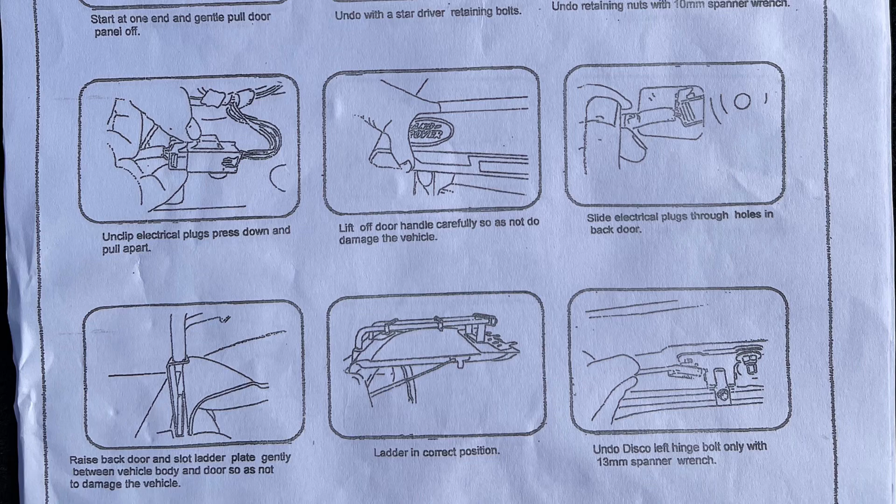The dreaded instructions. Is it bad that step 1, I have no idea what they're talking about? Look at that, step 1. What is that picture? It's going to be a bad day. So apparently that is that, step 1.

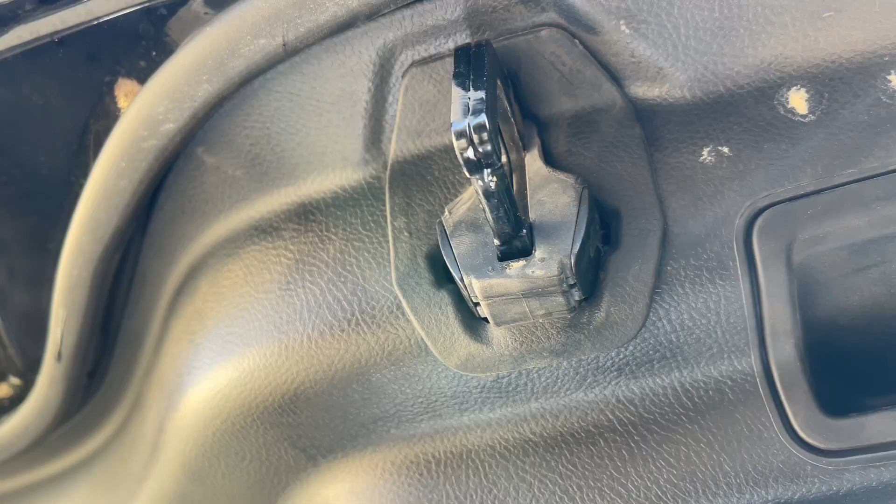So now you've got to gently remove this rubber locking grommet. I hope these instructions get better, but that's step 2.

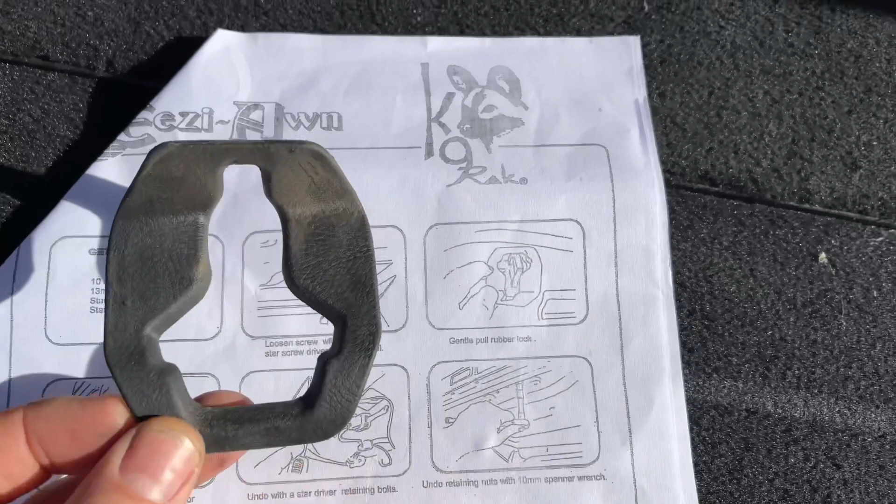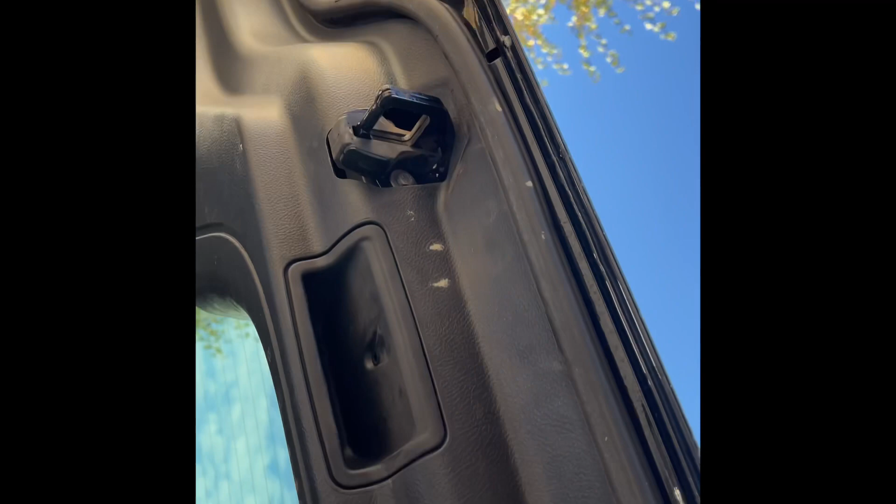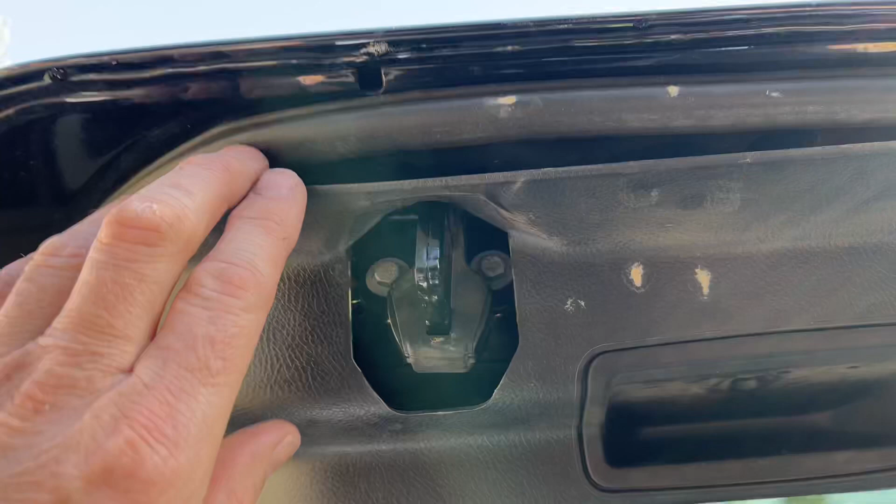Step 3, we'll just start at one end and gently pull the door panel off. So I'm guessing this here, it's got to come off without breaking it. This part here, I've just put my fingers in behind where the lock mechanism is and it seems to have pulled out. I'll just show you - in here, it's started to come away. So hopefully, oh, it sounded positive.

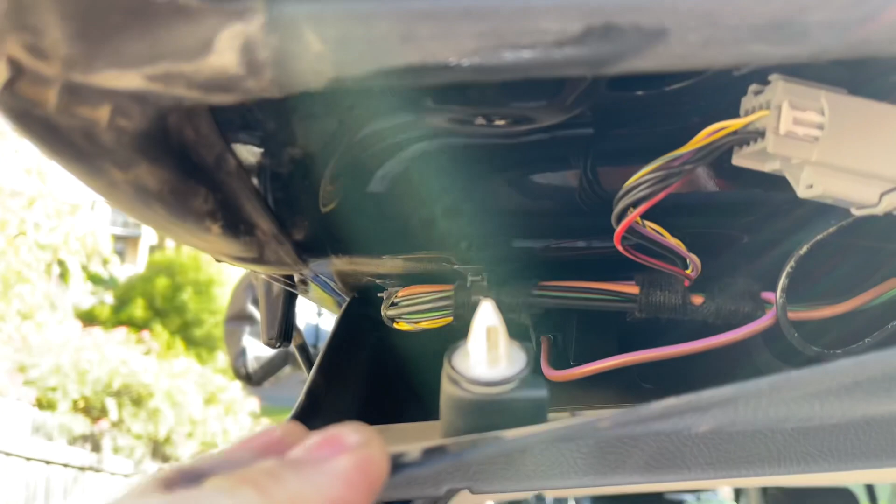Let's just see if we can gently - give me a second, I think I need 2 hands. So I'm just working my way along this edge. Just put your fingers in as far as you can and just keep prying it out. And there's little white studs, I suppose, that clip in. So hopefully I just work my way around - we might get this whole thing off in one piece.

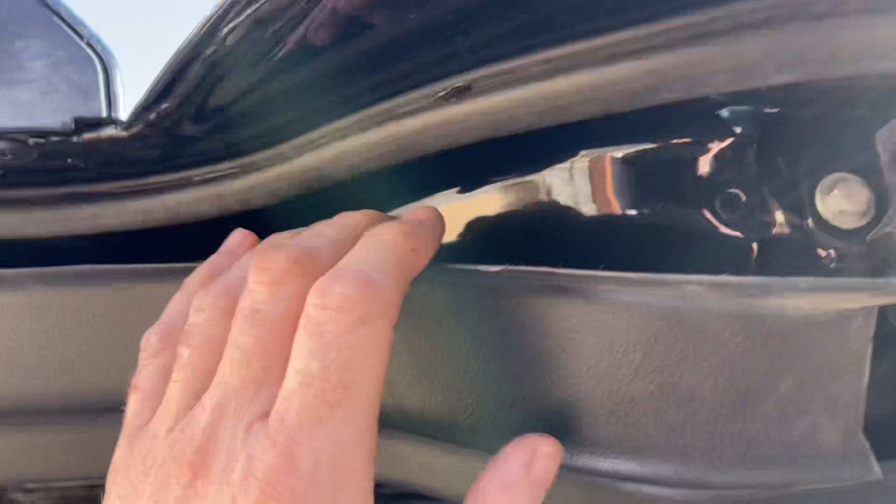Oops, I'll grab that. I think that's done the job. All right, looks like this is the last little bit, hopefully. We're nearly there.

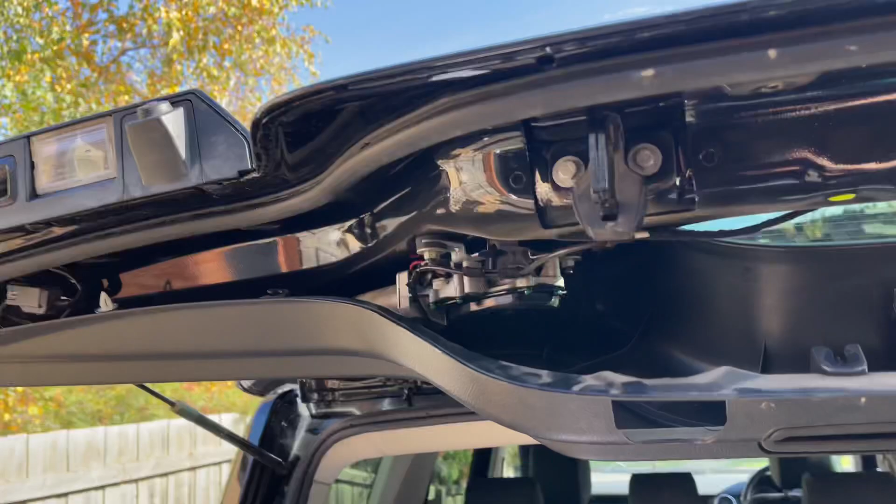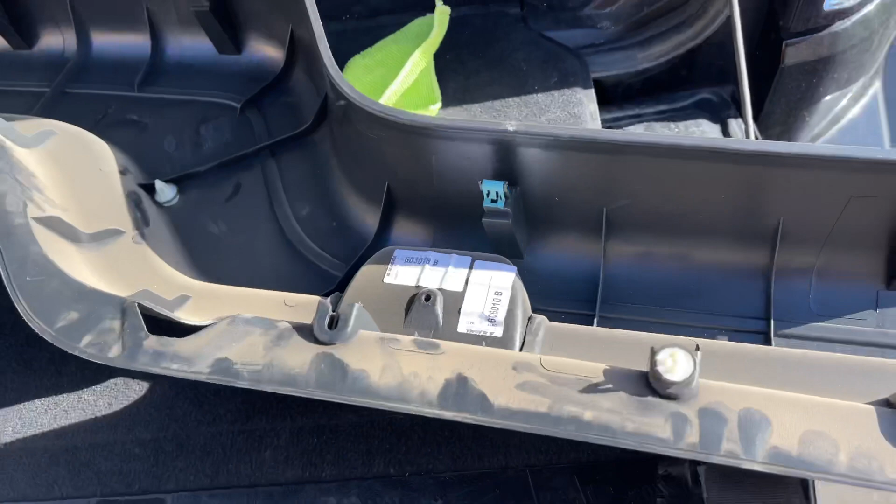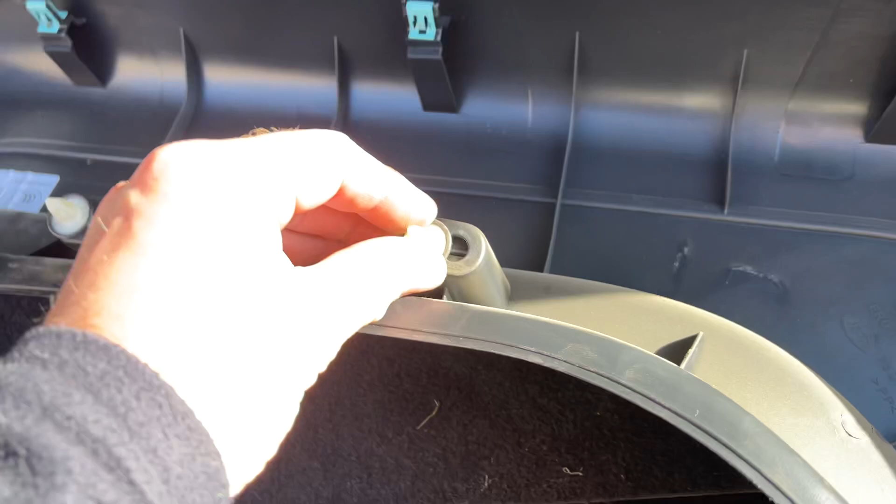I might just get 2 hands onto this one so I don't break this panel. What I've found is if you just put your hand up in the back here, you can actually sort of pull it off like that. And that will give us our back panel. I think I've actually managed to keep it all in one piece. Only one clip fell off, which I can replace. There we go, back panel is off.

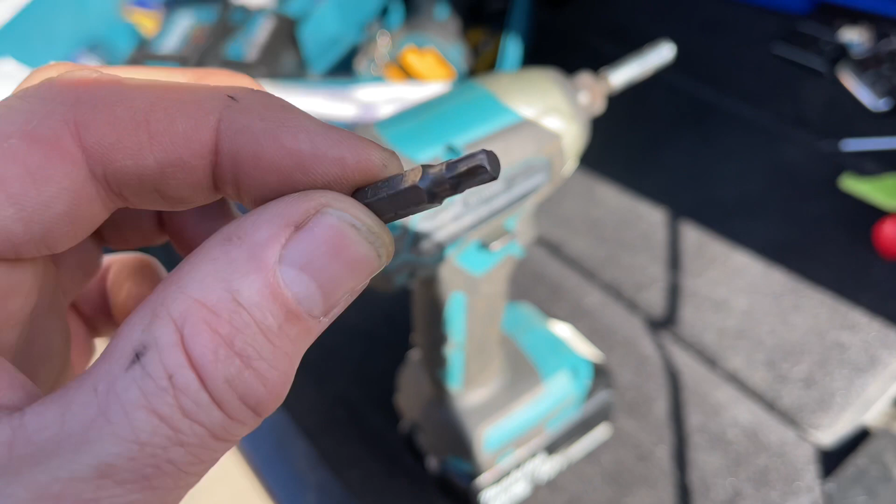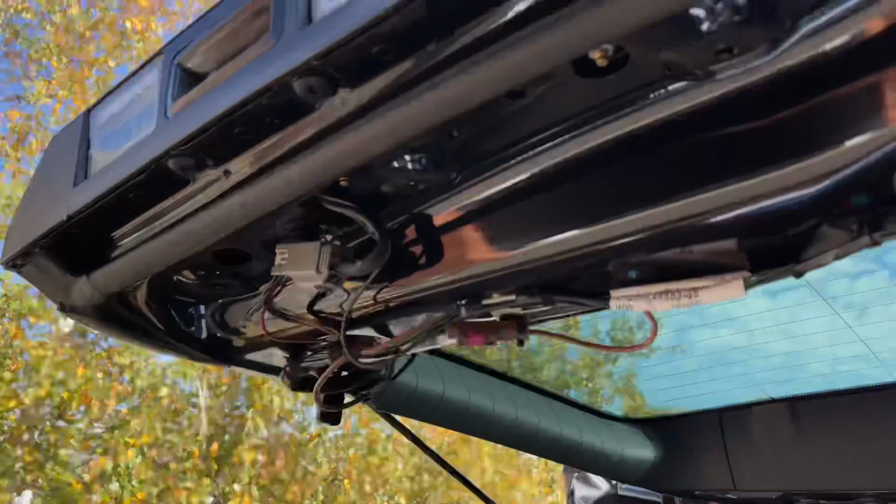And arguably looks nothing like the instructions. I don't know if you can see that, but that's a T30 star head. That's just what I've used to remove the rear light assembly bolts, or screws I should say - just those 3 there. So we'll take that off and we'll see how we go.

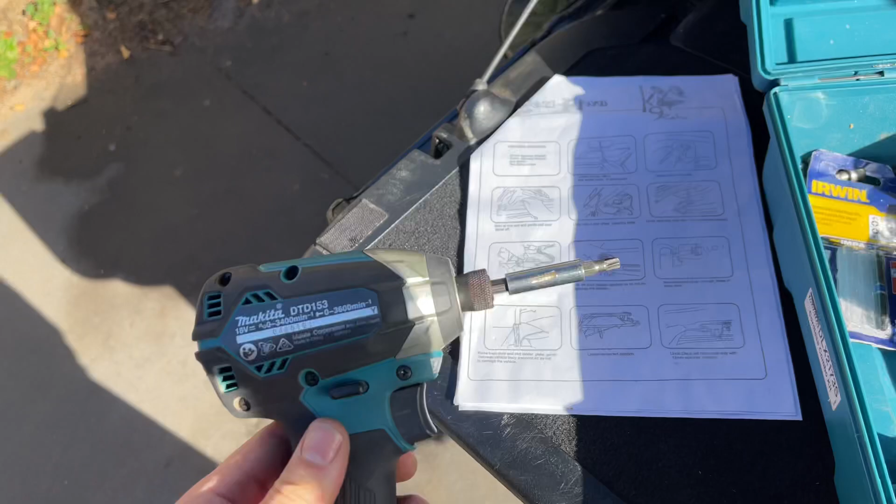That's what step 4 done. So I've just used an impact driver and a T30 bit to remove those 1, 2, 3. Just found with the impact driver, it just came out a lot easier.

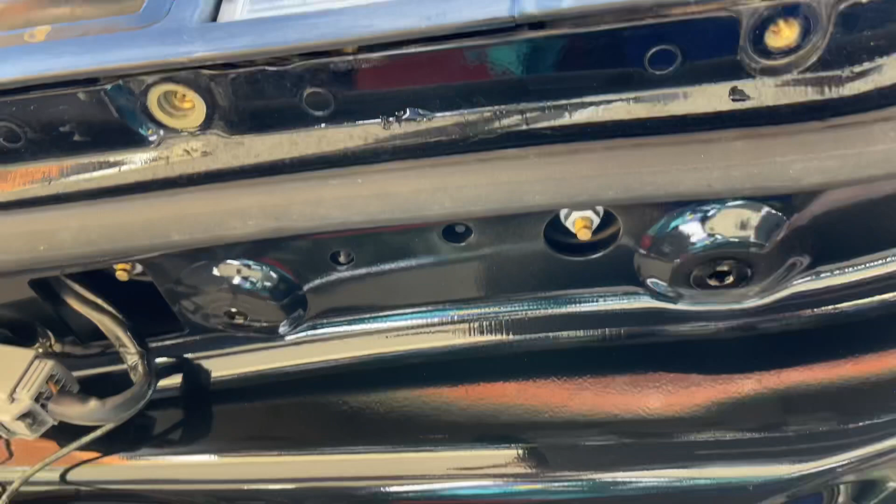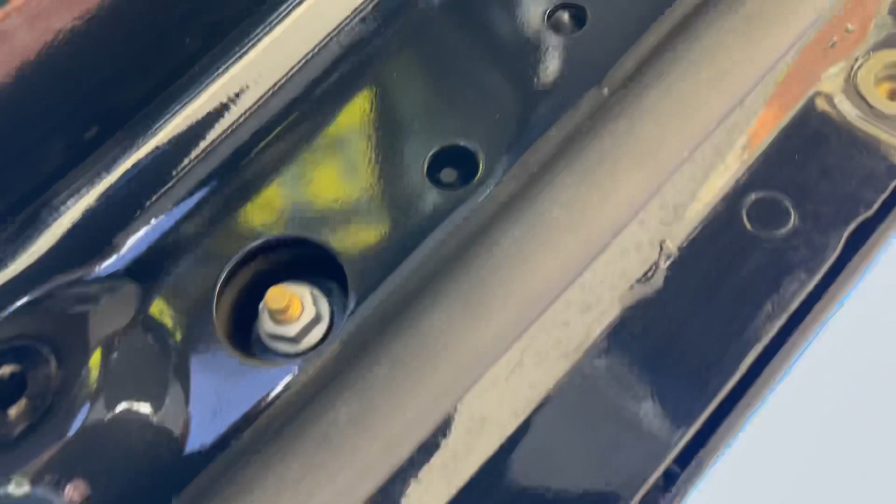Step 5, undo retaining nuts with a 10mm spanner wrench. So I have a 10mm socket, and we're talking about that one and that one, just under your tailgate where you've taken the cover off. Remove those.

Step 6, unclip electrical plugs, press down and pull apart. Maybe that one? Or that one? Or that one. I'm guessing it's this one, so we can take off the rear light assembly. So I think that's the one there. We just want to get this bit off here so we can put the rack in behind it, the ladder. So I think we'll try this one.

This next step is actually super simple. It is that first grey one. I'll just show you what to do - it's very easy. This little bit here, this tab, you just push that in, just get in there. That just slides apart like that. Easy done. Step 7, lift off door handle carefully as to not damage the vehicle.

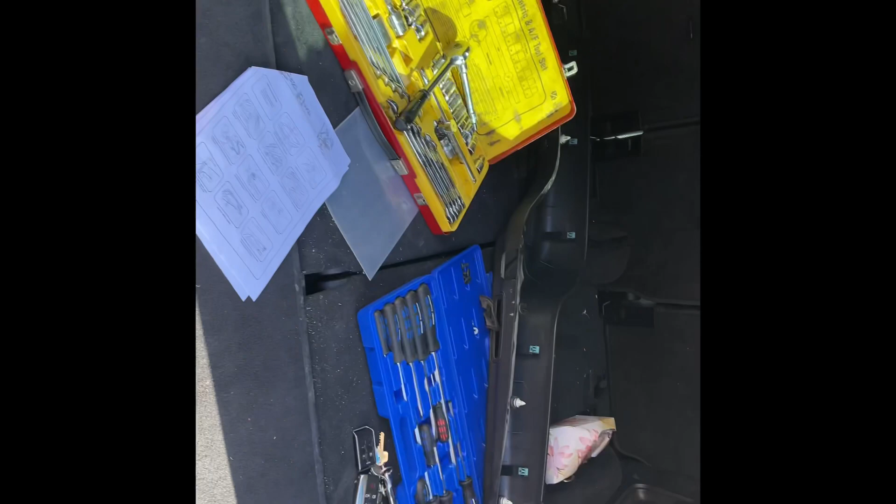Let's have a look. Let's put this down. This worries me. I might just put the camera down to see if I can get it loose. I also think I might need to undo some more clips. Anyway, let's have a look.

All right, amateur hour. So I managed to undo 2 bolts and not 3. So I'll just do the third bolt. That one in there, it's going to cause a problem. Those 2 are off - we've got 1 off, 2 off, and I forgot about the 3rd one. So we'll do that, hopefully it'll come off a bit easier. Take 2, this might be a bit easier with all the bolts out now. It's loose.

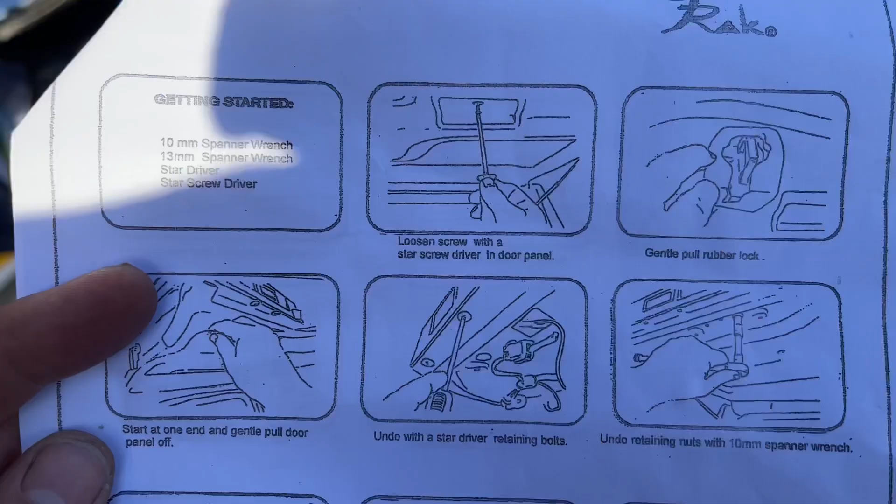Just seems to be stuck in here. Let me have a look. All right, so step 4 says undo the star driver retaining bolts.

So I can only see 2 in that picture, I was assuming there was 2. Allegedly there's actually 3. If you have a look just underneath the rubber weather strip, you'll see a 3rd star head that needs to come out. Hence my difficulties in getting it off.

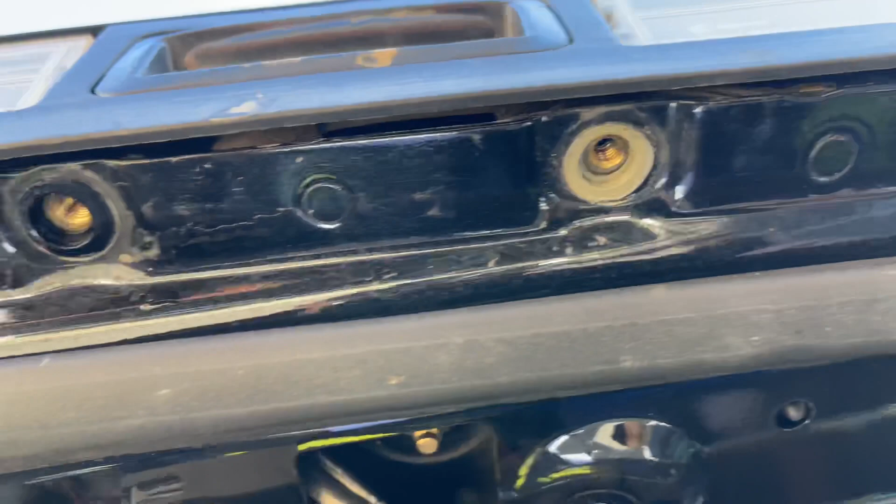So on the instructions, it looks like there's a couple: 1, 2, 3, 4. There's a sneaky 4th one, which is holding on that whole mechanism, which is giving me headaches. So here's a tip: with that extra star head out, it really just pops off.

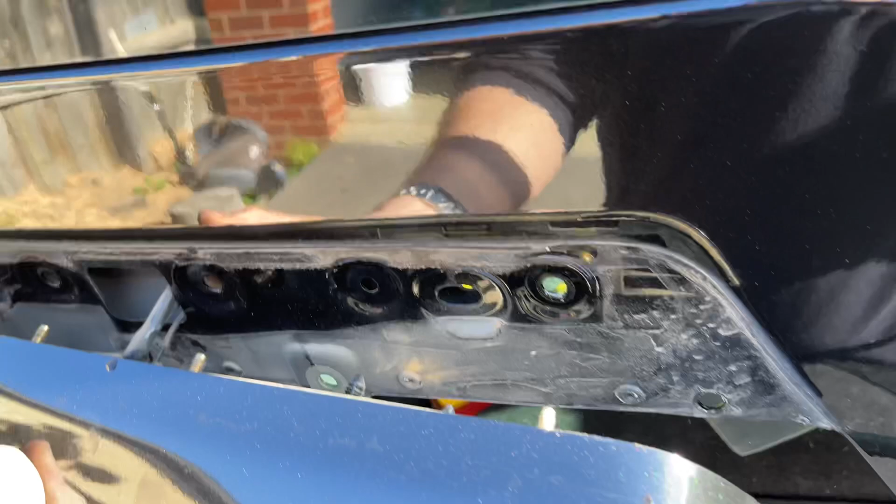Oh, there we go. I think I might need to remove or undo a couple more clips so this can come off. Leave it with me, I'll be back.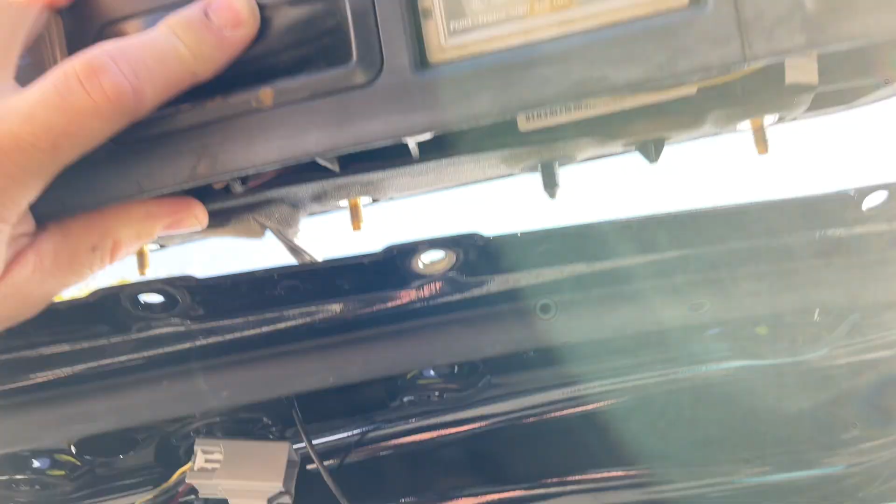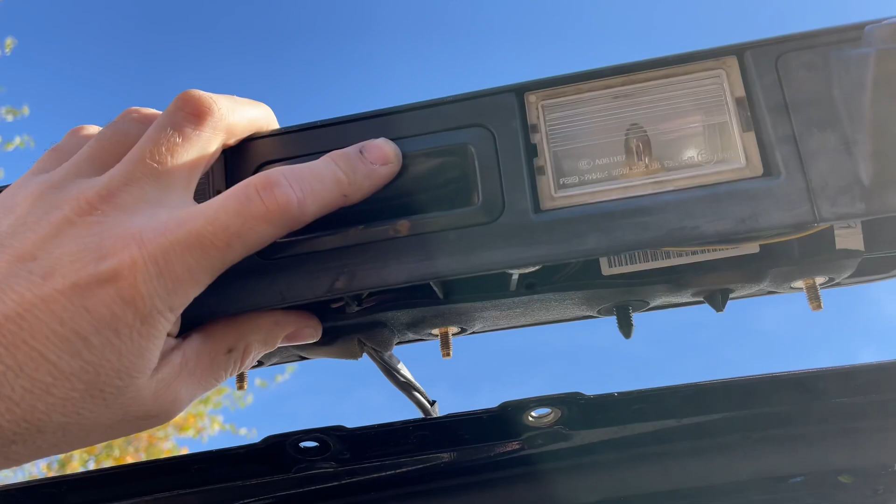So yes, tip: this brown one here needs to also come undone, otherwise this unit is not coming off. So I will do that and see how we go.

Okay, so this little brown wire needs to be also disconnected. Sorry about it being out of focus.

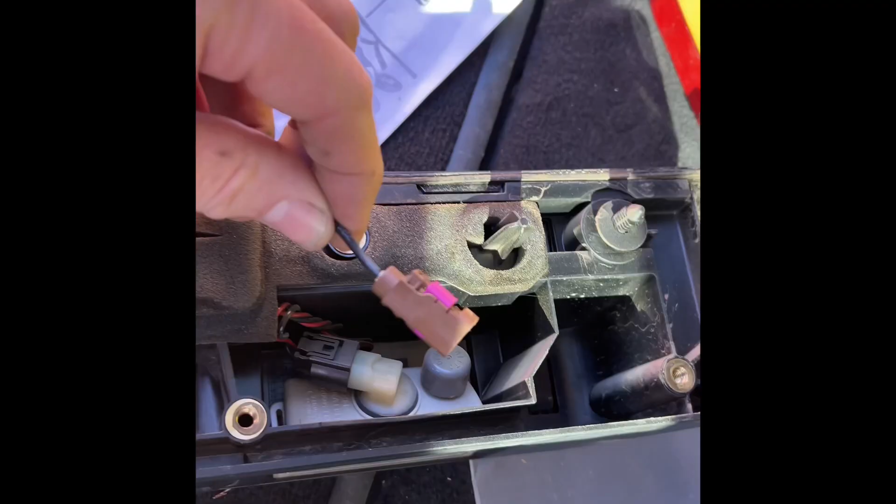What you'll see is if you just put a screwdriver down inside that little hole there, it will actually pop clean off very easily. So don't pull it, use a little flat blade screwdriver. A bit tricky to film, but if you just put a flathead screwdriver in that top section, just under that flap there, you'll find that it just comes straight off the clip.

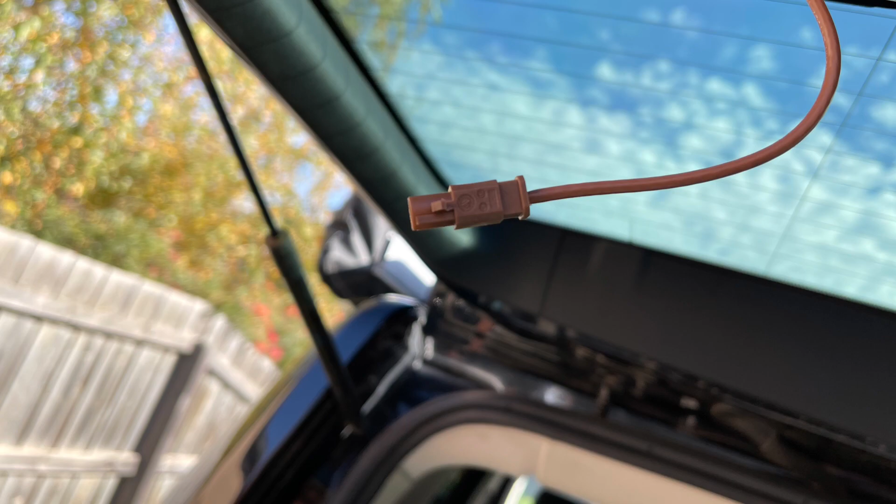Step 8 here is really self-explanatory. Basically, this plug will just fit through the hole nice and easily in the back of the door.

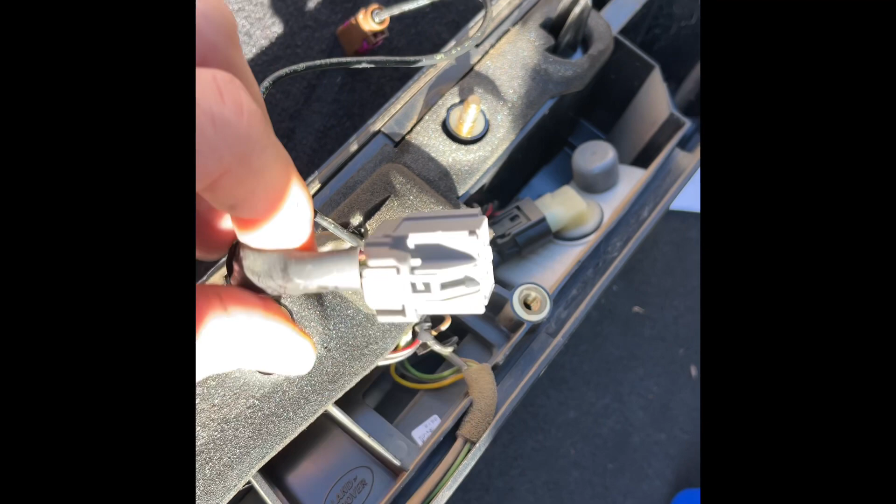We have the K9 rack. Comes with really grouse instructions. I'll just unpack this and we'll get started.

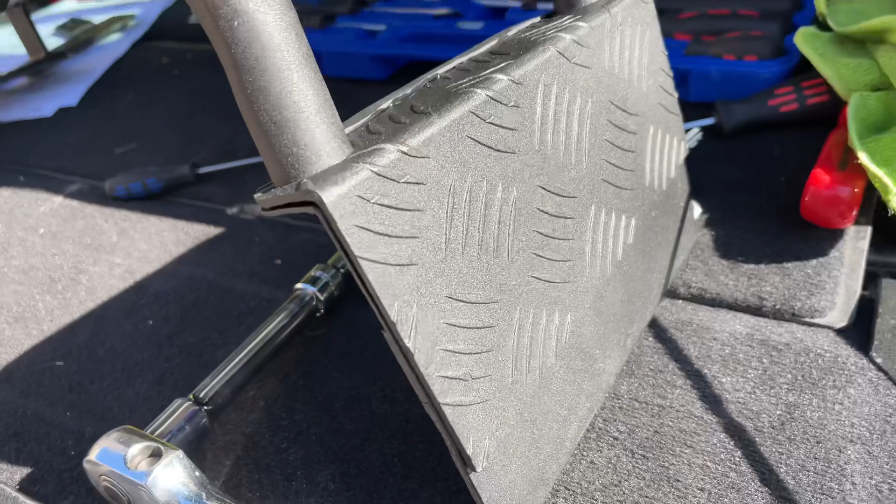Ladder. It looks pretty good quality. It's got like a rough sort of paint, I guess, on it, like a textured paint. And that'll have to go — can't have yellow on the black car.

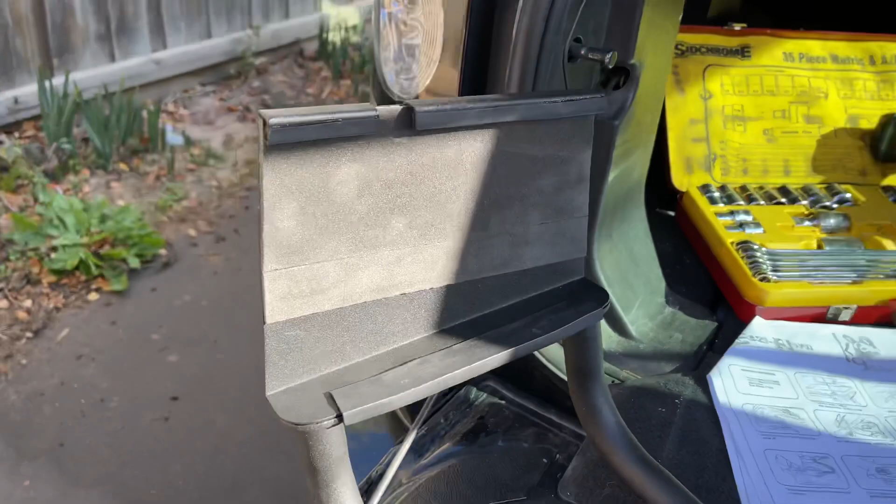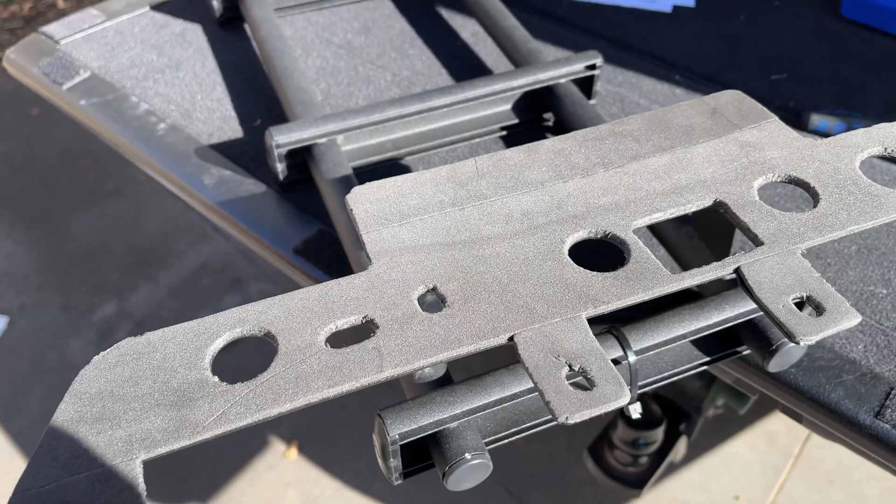And underneath, it's just got like a foam to protect the car. Don't know how good a job that'll do, but it's a decent amount of foam. And the same thing where it mounts onto the fitting we just took off, that big rear camera housing, I suppose you'd say, and the open and close button. So it comes with that, and this piece here, which I have no idea where that goes yet.

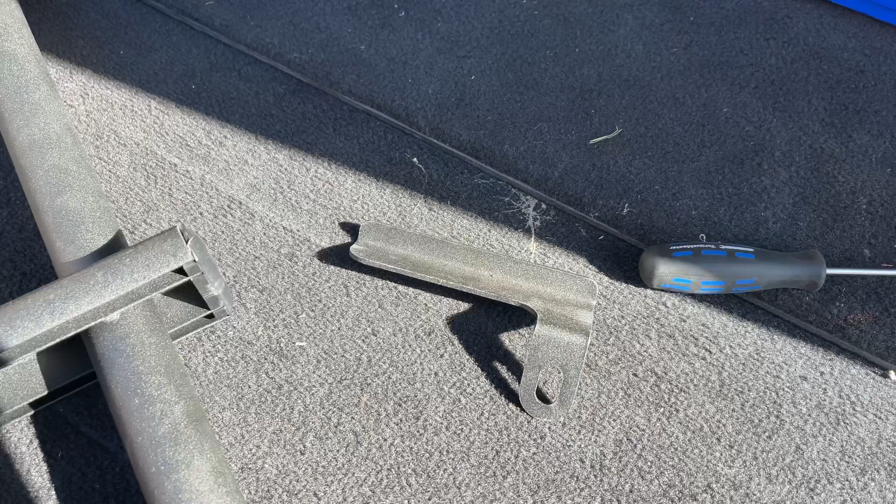Step 9, raise the back door and slot in the ladder. All right, I'll just give this a quick clean as well. I've cleaned all the back of the car here to make sure we don't have any dust between the ladder and the car, but I think we'll just get rid of some of that as well.

I've just slotted in the ladder. I needed 2 hands, so I couldn't film the process, but I will talk you through it — the best way to do it without actually scratching your car.

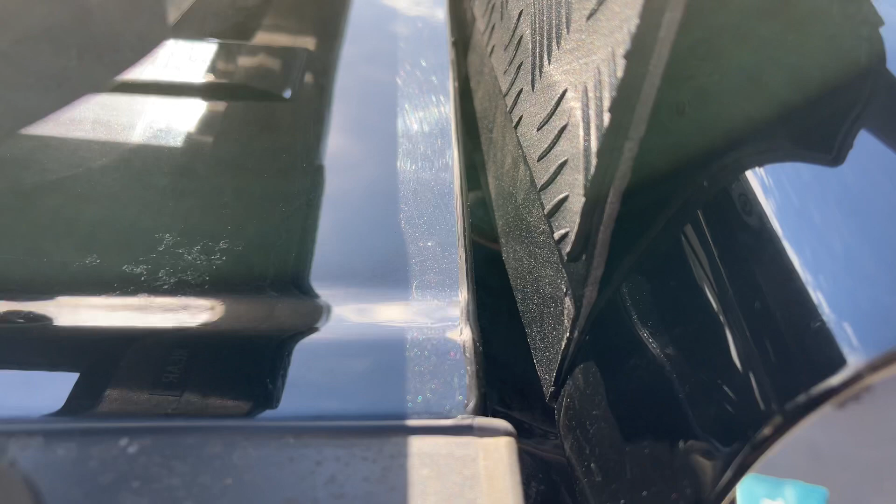So when you lay it in, I would lay it in closer to the left of the car, because it's a wider opening. Once you get the actual lip down inside the car, slide it across to the driver's side so it actually lines up at the back with your holes, etc.

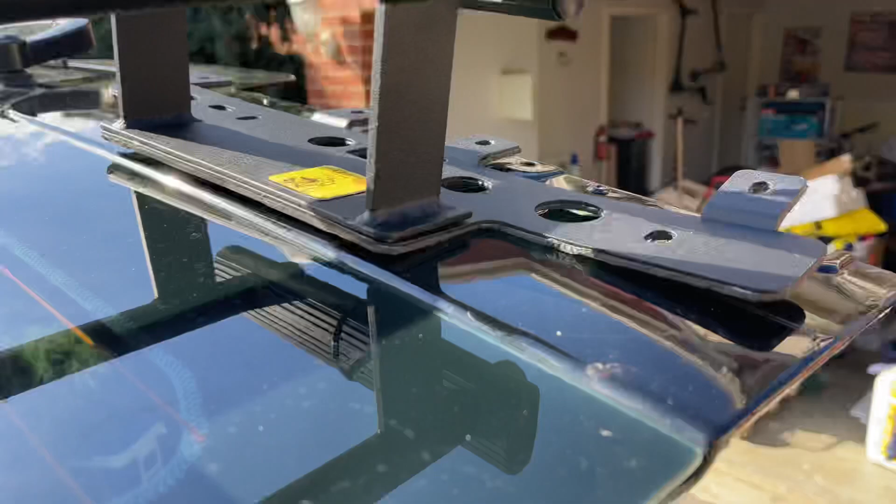So you'll see from underneath here, what I did was put it on here and then just slid the whole rack across to that point. And what you can do — sorry for my hands there — is just put your fingers underneath here and then push it up into place, and it actually seats really well, very easily.

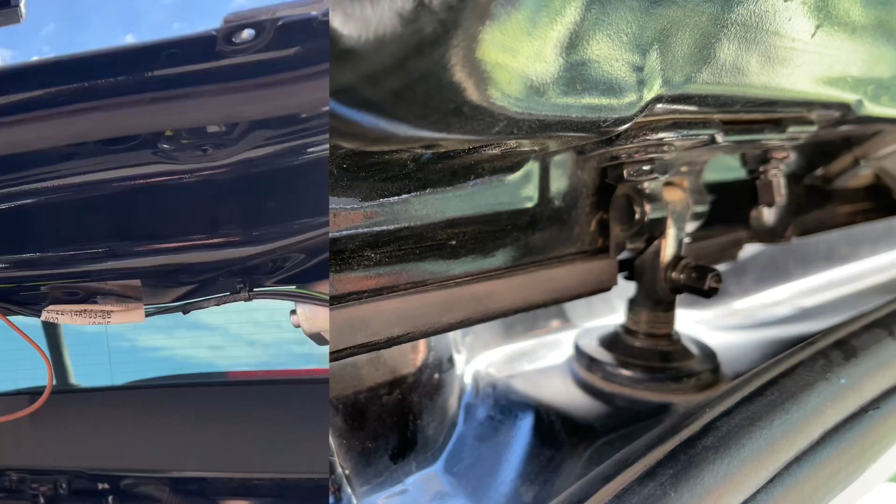Well, it's looking all right.

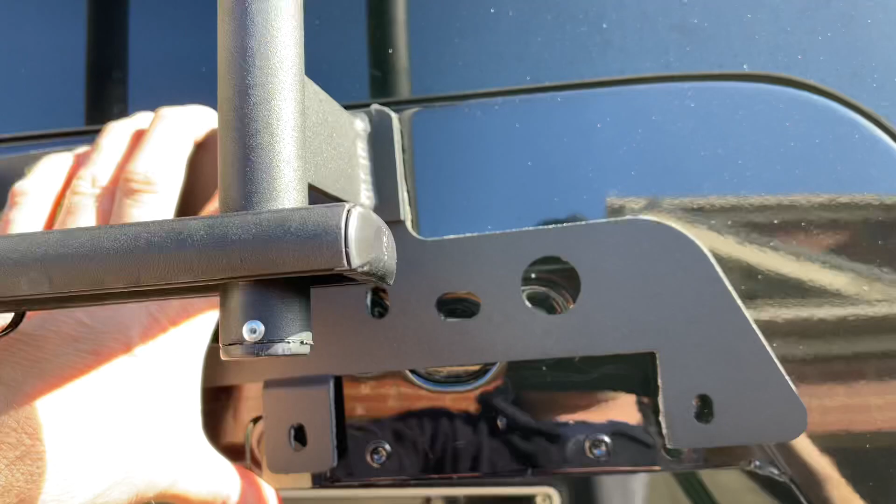So I think the issue I've read about before is these holes lining up. If you can see there, we're sort of a bit out. But whenever you put weight on the ladder, you can almost align those holes perfectly. So I think we're in a pretty good spot here.

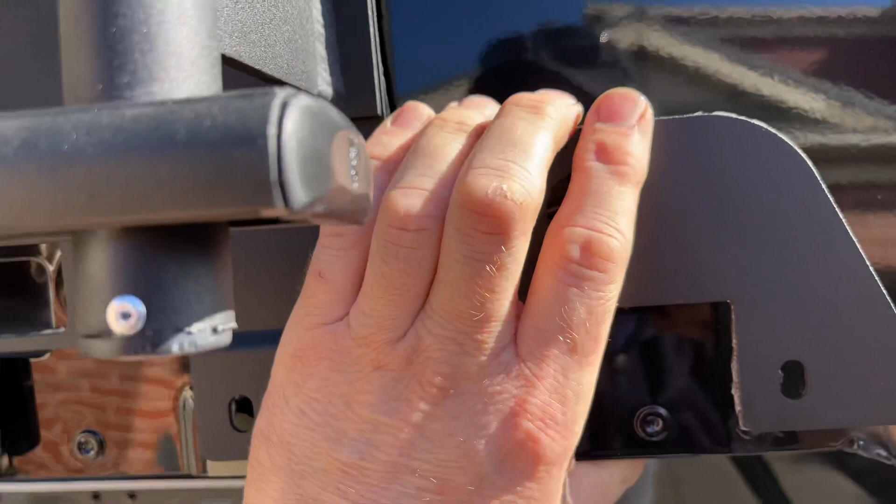And just to show you the clearance up on the back of the car, it's actually quite good. It's close, but it doesn't catch, which is good.

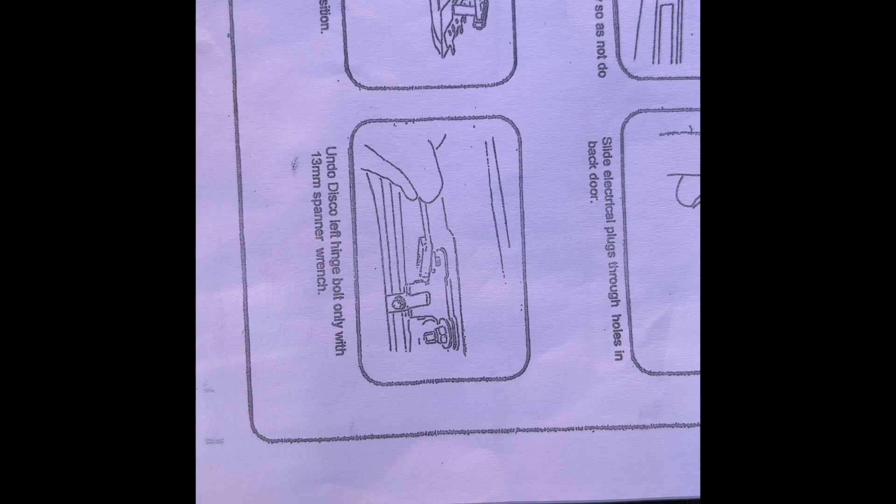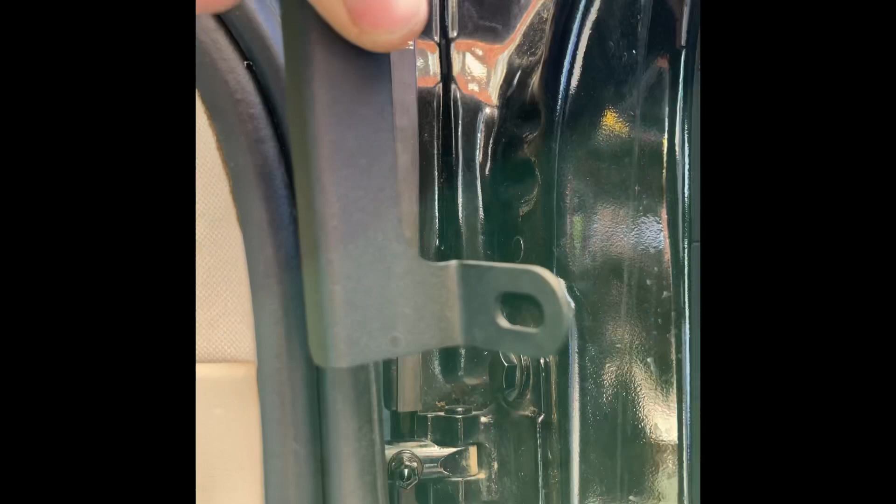Step 11, left-hand hinge bolt. So what they're going to do with that left-hand hinge bolt here, undo that one, and we're going to actually slide this bracket up in place and then put the bolt back through, and that is actually going to hold the ladder in place so it doesn't slide off.

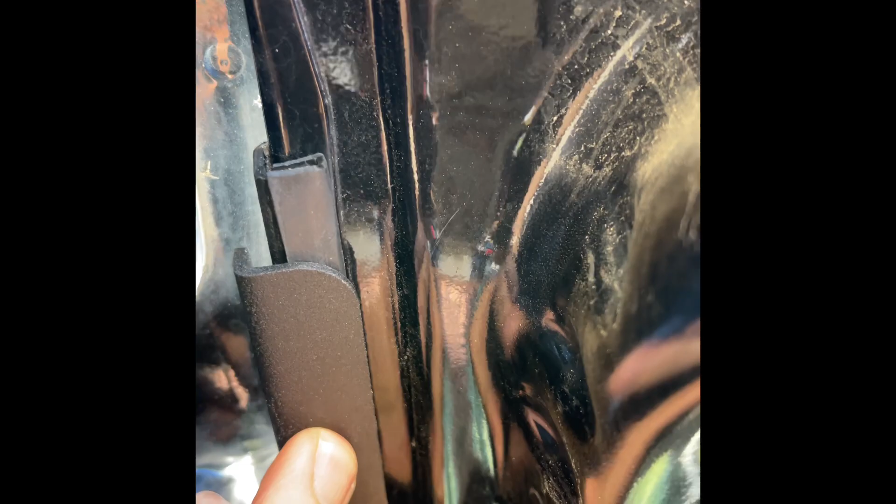It's actually quite clever. This one you'll need a ring spanner so you can fit it up inside here, and we'll remove that and install this locking bracket.

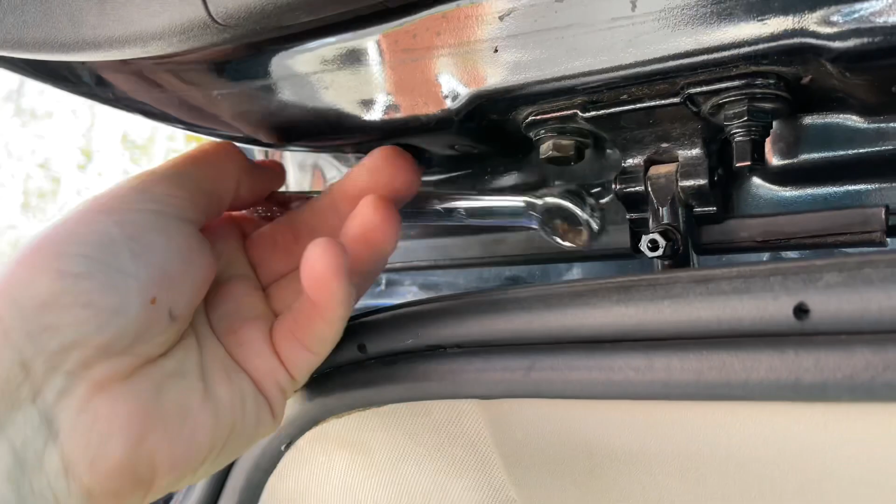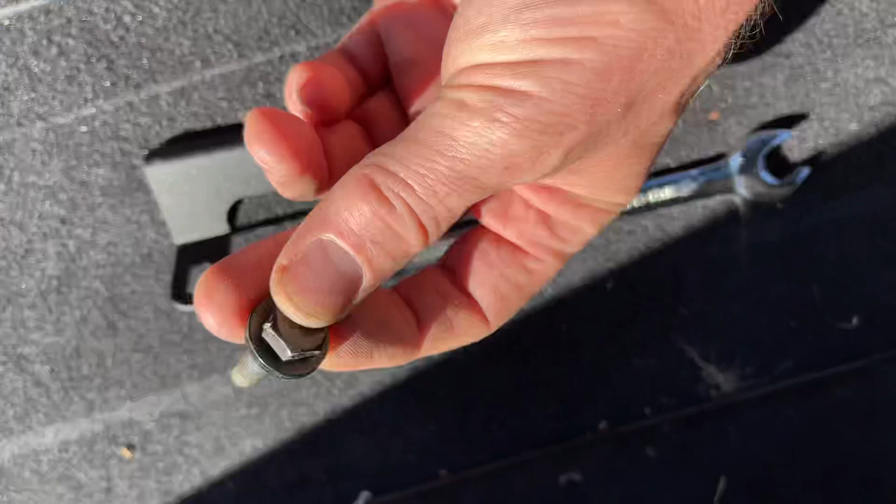Just loosen it, use your fingers, it was quite easy to get out. Okay, once you've used your 13mm ring spanner, this is the hinge bolt, slides through here. Then we'll just replace it back up in here and it will hold that bracket via that hinge.

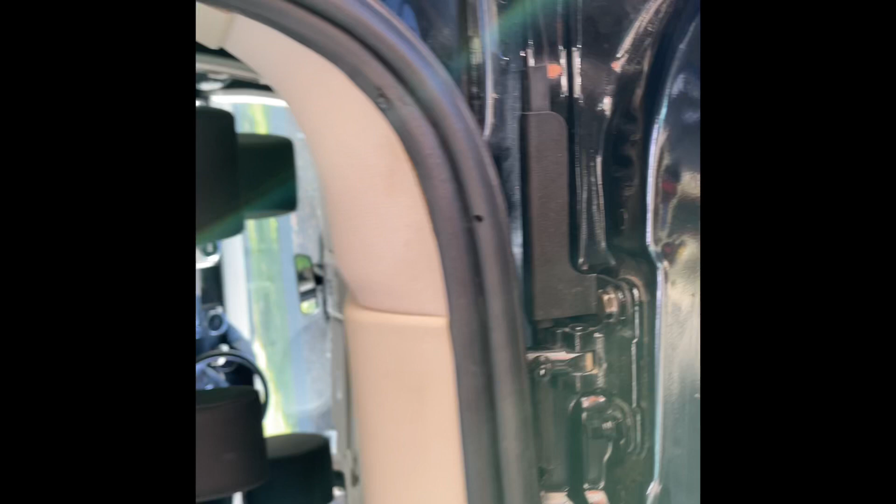12 and 13 completed. You can see up here, bolt's been replaced, and our bracket sits on there. It holds the ladder in place.

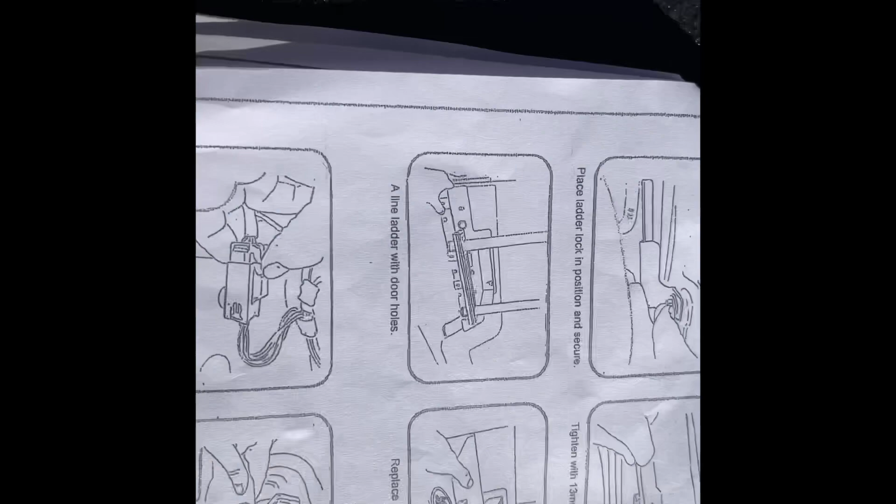So this next few stages that I'm reading from the instructions can be a bit tricky. It says hold the ladder in place, sounds good. Align ladder with door holes and replace the door handle. Apparently the foam is quite thick and can make this a bit of a challenge, but we'll see how we go. So we'll knock these steps off.

Right, well, that's been the hardest bit yet. They say simply align the holes with the ladder and refit the nuts. But because you've got the foam between that little panel you've taken off and the ladder, you can't get enough thread to bite the nut onto it.

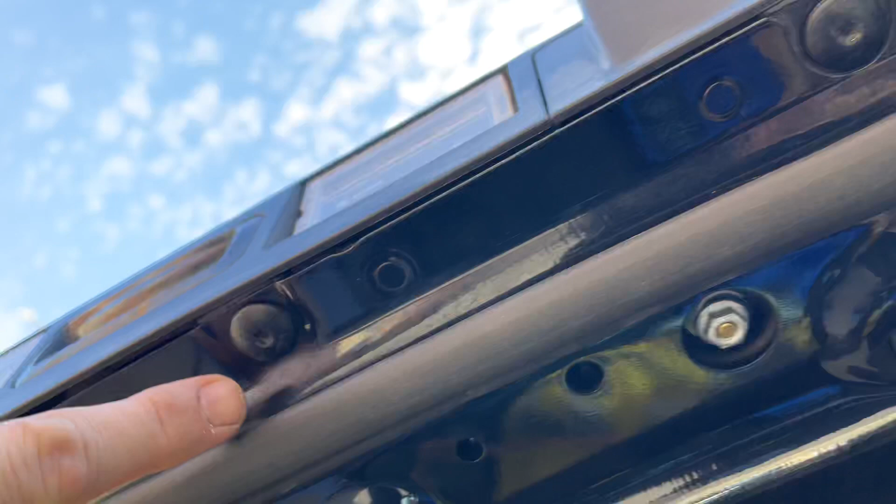So what I found, and I'll just show you what I did, was to put these ones back in first. And what I found was that actually pulled the unit closer to the car, which then enabled you to push this over, because when you do the bottom ones, it pulls it out a little bit.

So what happens is, put your bottoms in, tighten them up, and then keep pushing this in and pulling down on the ladder. Eventually the screws will come through enough that you can actually get a thread on. You'll find it really stressful, but take it easy. It will come.

But yeah, put these 3 in once you get it basically situated, and you can see the gold bolts coming through the holes. From that point, you should be able to maneuver and manipulate it and get it all in. So I'll just put these last couple of bolts in. I think we're getting very close.

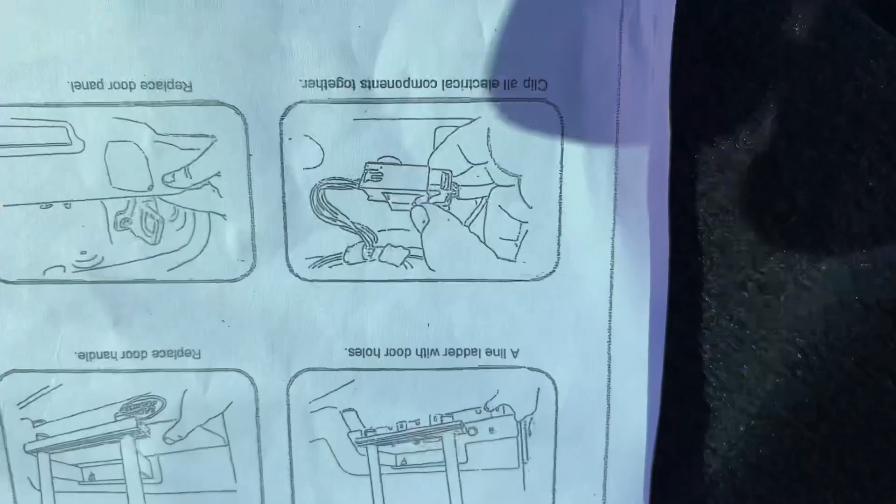Okay, 18, let's just put the clips back together. I'll do that, and then we have to worry about trying to get this rear panel door on.

So back door panel, just put those plastic white clips back in the right spots, line it up, and I'd argue just give it a whack in each spot as you go around the door. Just keep thumping it, and yeah, it just clips in easy.

Final 2 pieces, just that screw back in and the rubber locking grommet around the mechanism there, and I think... okay, let's try it out.

Hey, there we go, she works. Excellent. There we go, job done.